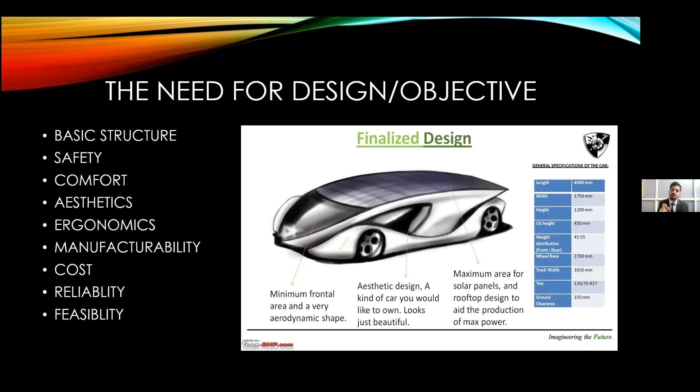Okay, so let's discuss a couple of things while designing a vehicle. First is the application. Let me consider some examples.

Just suppose I'm a person who completed my graduation 4 or 5 years before, and I'm working in an organization, and now I'm capable to own a car with finance. My family never had a car, this is my first car in the family, and I belong to a middle class family. Cost and mileage are crucially important for me. So which car would you suggest to me?

Can anyone answer that? Hello. Participants, please. I-20, okay. If anyone wants, you can type in the chat box. That's okay. I-20. Yeah, kind of I-20 or Maruti Suzuki. I'll prefer Maruti, yeah, definitely.

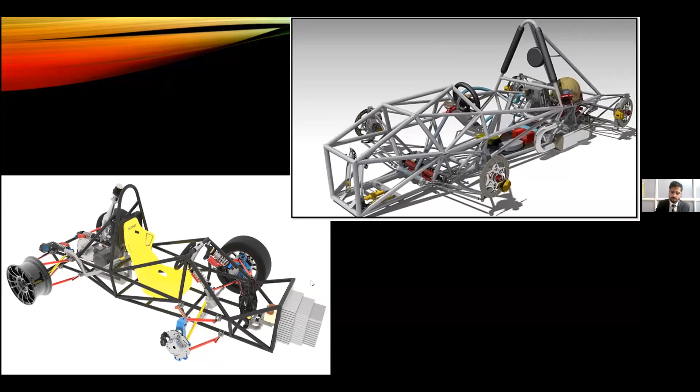Okay, so here are some videos. Just look at what we're discussing about the application of the car according to the market segment - how companies design their cars according to market segment, and what are the priorities: mileage, aesthetics, performance, or adventure and excitement of speed. Just look at it.

Is the audio coming? Yes sir. No, not yet - video was not audible. Ah, was the video audible? No sir. Okay, just now the video is coming.

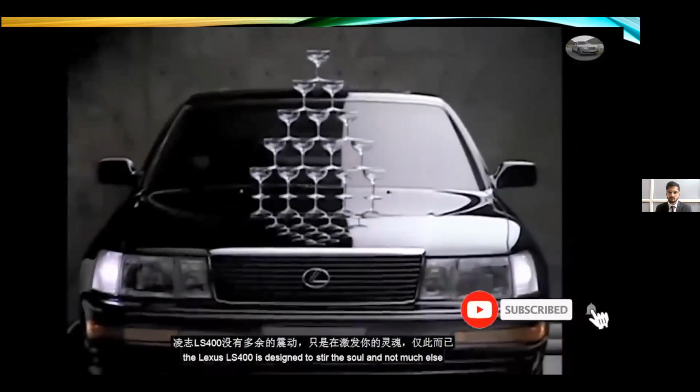After years of intense work, Lexus is ready to celebrate.

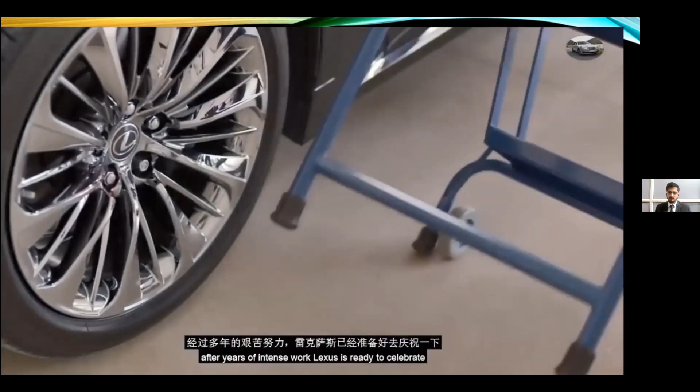Because even at the equivalent of 145 miles per hour, the Lexus LS400 is designed to stir the soul and not much else. Happy anniversary, Lexus.

Stability, elegance. Great.

Guys, I would like to hear more answers. So what's your comment? You can type anything.

There are various kinds of factors associated with this vehicle. Lexus is focusing on the comfortability, elegance, and stability of the car. Their primary focus is stability. Okay, just one more video.

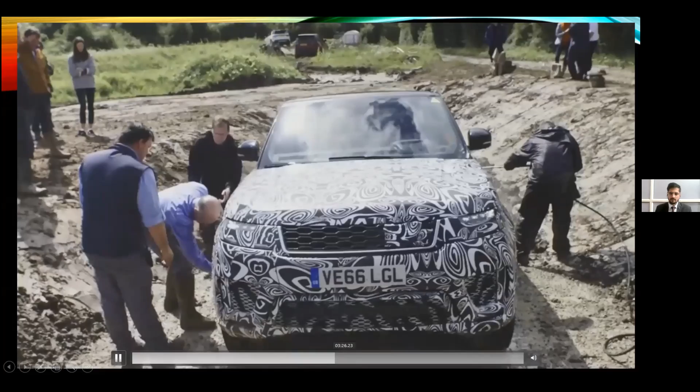This challenge is the most extreme one we've done yet. The plug-in hybrid, having that grunt of both engine and electric, will be a great benefit. But we're really pushing the limits. There really is a chance of failure. As far as I know, nothing has ever been tried like this before. This is unheard of. It's crazy.

It's very steep, it's 45 degrees. Well, yeah, it's like this, right? Yeah. I can't see anybody living if the car started rolling back down the hill.

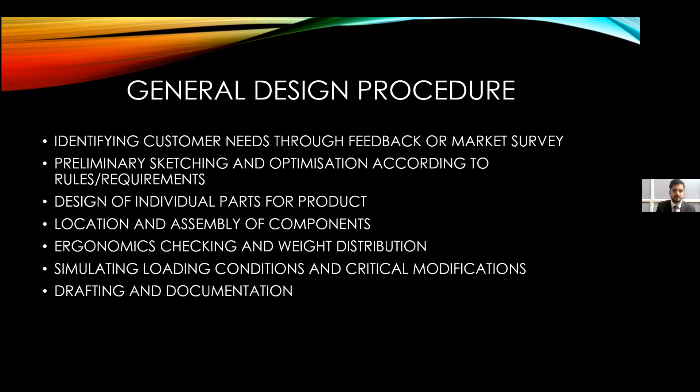So let's discuss what is the chassis and what is the frame. Before discussing it, can anyone tell me the difference between the chassis and the frame in the chat box, or you can open your mic and we can discuss it.

Okay, so should I go ahead?

Chassis is the base of a car. Okay, this is in a metal. You can call it as a foundation. Yeah, that's great.

Okay, I understand, guys. You are taking sessions from morning and it's your last session. But that's okay. Let's make this more interactive. And if I'm boring you at any time, you can say to me. Yes. Oh, that's great. Tejas, Gaurav, Anil. Yeah, that's great. That's great.

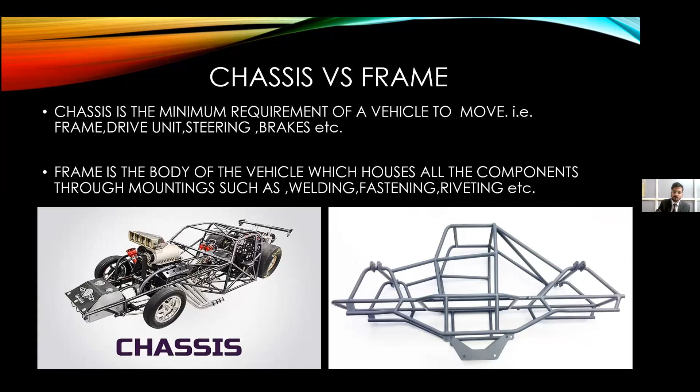Commonly used material for a vehicle. So when we design a vehicle, we generally use three kinds of material. Either we use steel tubes, aluminum kind of alloy metals, or carbon fiber materials, or related with glass fiber also. Okay, so every material has a different kind of specifications and different kind of rules in different types.

Okay, so when my budget is limited, and I need to make a good quality vehicle, weight is not a constraint for me, so in that case I'll use a steel tube. If weight is a major constraint, and budget also needs to be considered, I'll go with the aluminum tube. And if the budget is not a constraint for me, and I need to make a very efficient, lightweight vehicle that could deliver a high performance, I'll go with the carbon fiber.

Okay, so can anyone tell me, most of the vehicles available in the market, or most kinds of projects that we participate in, either SUPRA or BAJA, we generally use steel tubes. Why do we use steel tubes? Is this for specifically?

Okay, so basically for us, the major constraint is manufacturability. Yeah, cost effectiveness is one of the major concerns, but I'll not take the cost consideration, because if you are able to crack some good sponsorship from the market, you can put lots of cost in your vehicle. But the major constraint is manufacturability. We have limited resources in college. You are not running an industry, and even in industry, we don't have each and every kind of machinery. So everyone has a different manufacturability constraint.

As far as a college project is concerned, our major concern is manufacturability; we have limited resources for welding, grooving, cutting, or bending, everything. Okay, so we prefer steel tubes because weight is a factor, but not a major factor. If you are participating in a solar vehicle, definitely weight is a major concern. In that case, a couple of teams, you will see, use carbon fibers for their chassis, for their whole body.

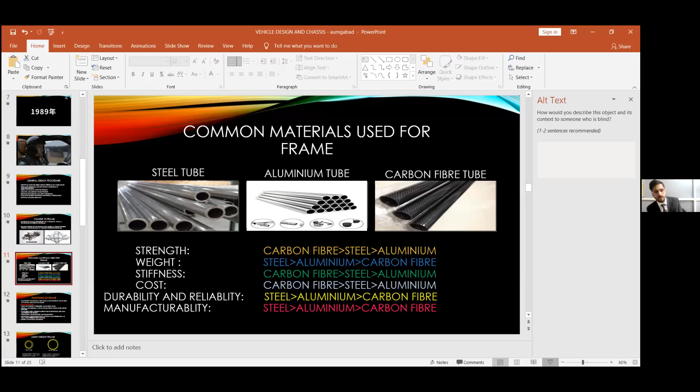Okay, so these are the factors we need to consider while selecting our material: strength, weight, stiffness, cost, durability, reliability, and manufacturability. These are the concerns for a frame. We have already discussed a couple of things. So, what are the mechanical components or vehicle dynamics that carry a load on the frame? All the factors need to be considered while designing a frame that will carry the weight of the vehicle in a passenger vehicle or a cargo load. So according to the stability or strength, we need to select our material.

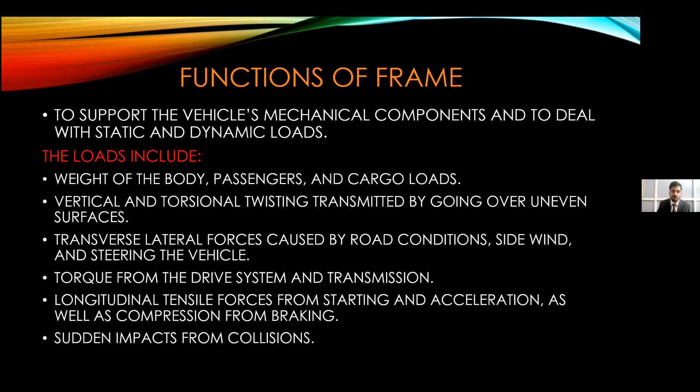And what are the mechanical properties we need to see? Either yield strength, shear stress, tensile strength, longitudinal tensile forces. All the forces we need to calculate while designing a frame or selecting a material for a frame. Okay, so let's consider an example. You take a steel tube, its diameter is 25.4 mm and thickness is 3 mm. And the second time you take a pipe whose internal diameter is 31.75 mm and the thickness is 1.65 mm.

Okay, so if we go with the calculation, you will see that the bending strength is about 387 Newton meter, bending stiffness is 2700 Newton meter, and the weight of 1 meter is around 1.64 kg. And if we go with the calculation for the second type, we will find that bending strength is around double that of the first object, stiffness is also 1.3 times higher than the first object, and weight has reduced from the first object.

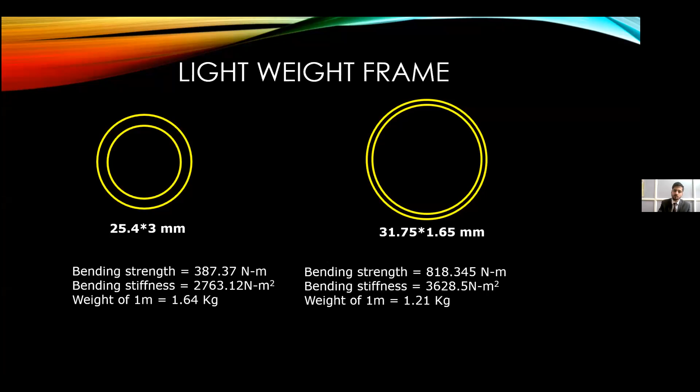So we should choose material after all the calculation. Here you can see that if I choose the second object compared to the first object, I can reduce my weight 26%, and my bending strength is also improved. Because if you go with the formula of bending strength and bending stiffness, the internal radius or internal diameter of a hollow pipe plays a very crucial role. If you remember the formula, that's pi by 4 r to the power 4 outer minus internal. So your radius to the power 4 plays a very crucial role.

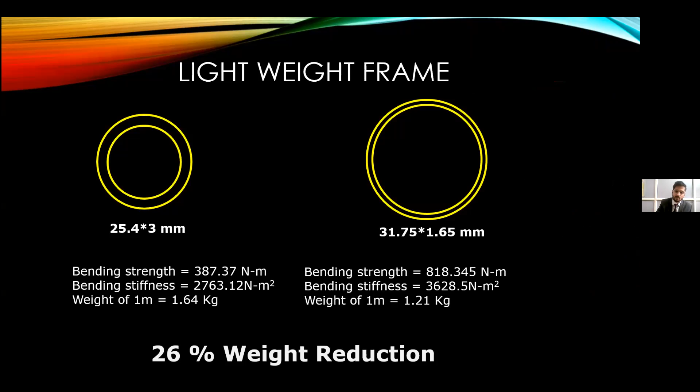Okay, these are all the factors that need to be considered before designing a frame. A couple of points we have already discussed: weight distribution factor and height of CG, which control your vehicle stability and handling, the ground clearance, and bending and torsional stiffness of a frame. If you are designing a solar vehicle or an electric car, definitely you need to work on your panel area, because it must tap maximum solar power so that you can utilize the maximum efficiency of your vehicle.

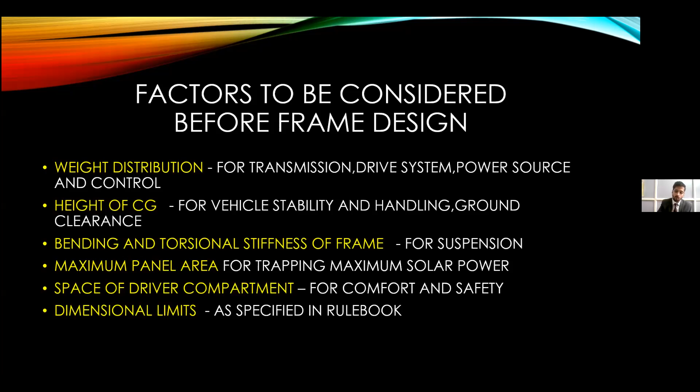Okay, and space of your driver compartment. Your driver should feel comfortable when he or she is driving a car. So the space for the driver should be ample so that he can operate each and every instrument cluster, gear, clutches, panel, everything in a very smooth manner. The dimensional limits: if you are designing a car for an event, definitely you need to consider all the dimension limits specified in the rule book. Okay, these things are about weight distribution and vehicle dynamics.

We generally study three types of motion of a vehicle. First is rolling. These are the failure modes: when the vehicle is running, what kind of vibration or what kind of failure could happen. Just suppose your vehicle is going straight and it rolls to the left side or the right side. So it's called a rollover; your vehicle is rolled over. If your vehicle is going straight and this kind of motion happens, it's a yawing motion. It's because of your suspension and because of your steering.

And if your vehicle is steeply going downward, and when you are accelerating your vehicle is going upward, it's called the pitch of your vehicle. When you suddenly panic brake, it goes deep down, and when you are accelerating your vehicle, your front side goes up. So that's called pitch. So all three dimensions we need to consider while designing, and apart from the frame, other compartments like suspension and steering, we need to consider all the factors. So these are a couple of factors of the weight distribution of a car in a hilly area.

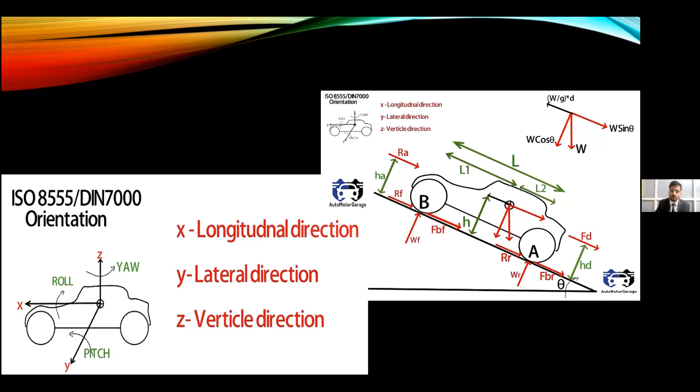So watch this video carefully. It's very well explained about the frame, step by step, like how we design a frame and which kind of mountings and which points need to be considered. It's a very old video, but a very relevant video.

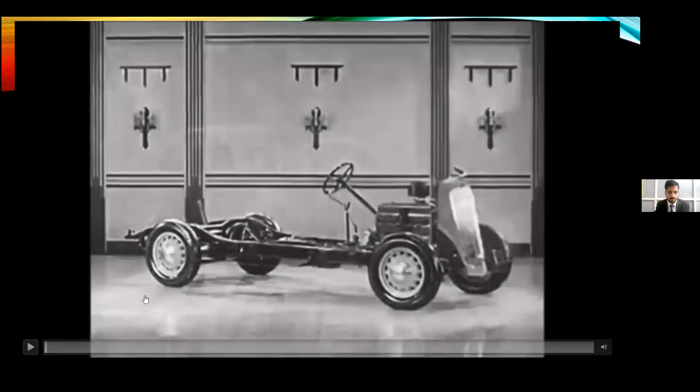Automobile, the foundation is the frame.

Is the video audible? Yes, sir. Anyone? Yes, sir.

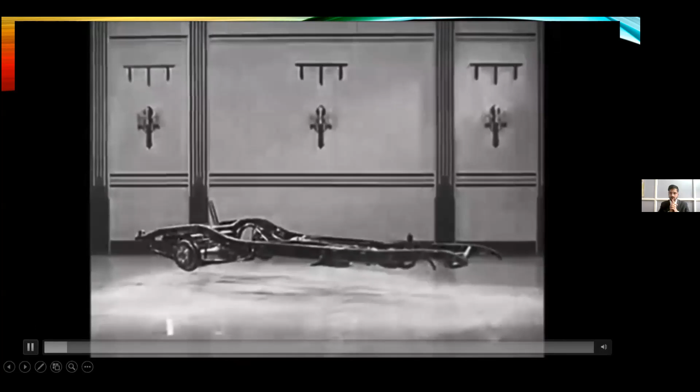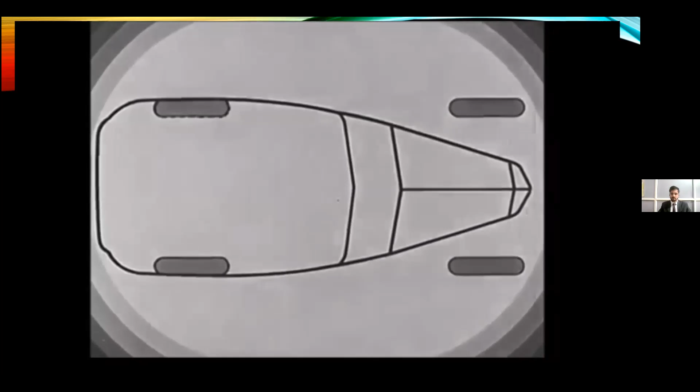Yes, sir. Few people see the real foundations of their houses, and few owners see the frames of their automobiles. And there are many important engineering developments in the modern automobile frame which aren't apparent when you look at the car. Let's see what an automobile frame has to do, and what kind of a frame is required to do the job. This line is the road. These are the wheels, and this is the body. Now let's look at it from another viewpoint, looking down on top of the car. The car is supported at four corners by the wheels. We must have a strong, rigid foundation to support the body over its entire length. So let's take off the body and build a foundation, starting with these two pieces of steel, which we will call side members. Now we need something to keep the side members apart and something to hold them together.

So we put in two more steel pieces, which we call cross members. But how are we going to turn those front wheels? They haven't enough room. Well, let's give them all the room they want. Let's make the frame narrower in front. That's better. How about the rear end of the frame?

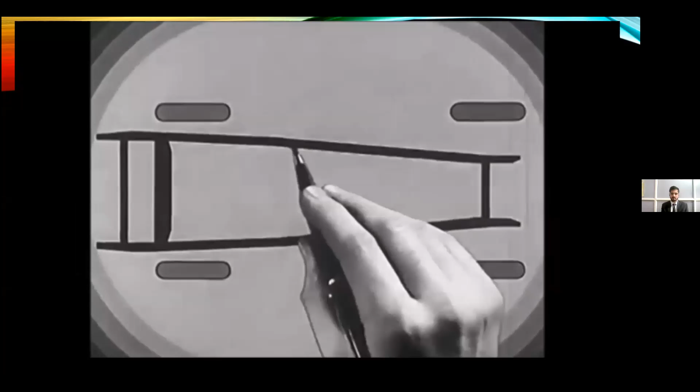We've got one cross member, but that's not enough. It will give us a good, rigid support for the gas tank, but we need something stronger than that. Let's put in another one that makes the rear of the frame strong and rigid. And just to make sure that our foundation won't go together in the middle like this, let's put in another cross member right about here.

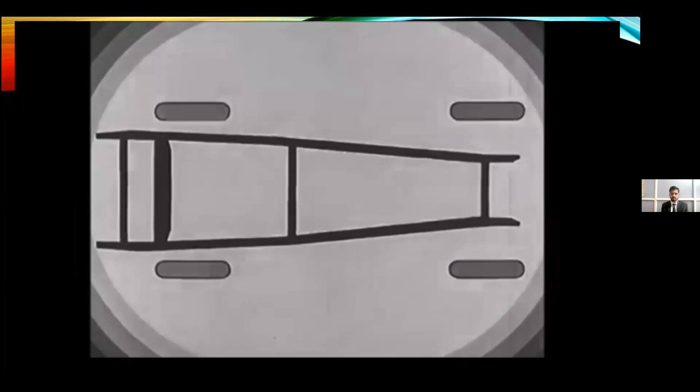Now we have a frame that you can't pull apart, that you can't push together. Pretty good job as far as we've gone. Hey there, that won't do. To prevent this sort of thing, let's put in some more steel girders like the letter X.

Now, any force applied here will be transferred to the center of the frame. But we don't want to be compelled to make this center crosspiece too heavy. So, to help spread the strain, let's put in these members, like the letter K. Of course, we have to consider the engine. We're going to support the front of the engine here. So we'll have to have another cross member here to support the rear of the engine.

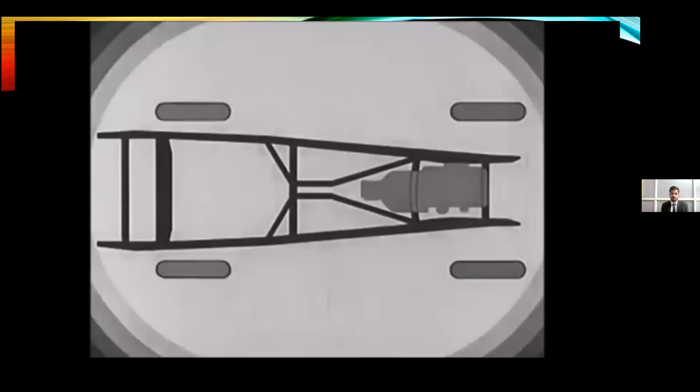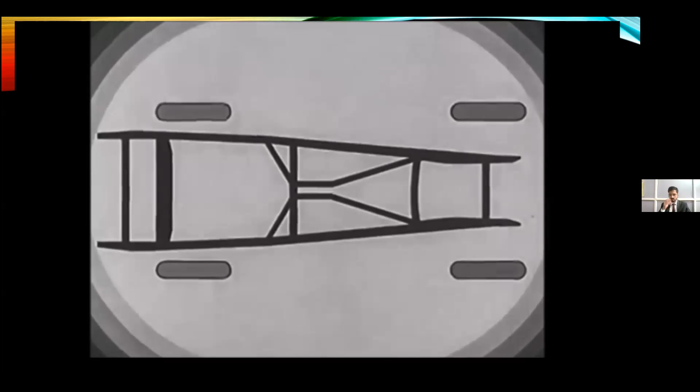Now we've designed a skeleton frame. But before we ride on it, we'll have to do some figuring. And the first thing we want to know is, what part of the frame is going to get the most severe strain? Or, as engineers would say, where is the point of maximum stress?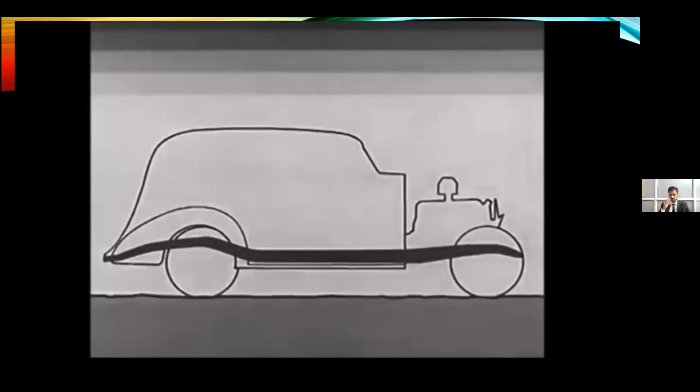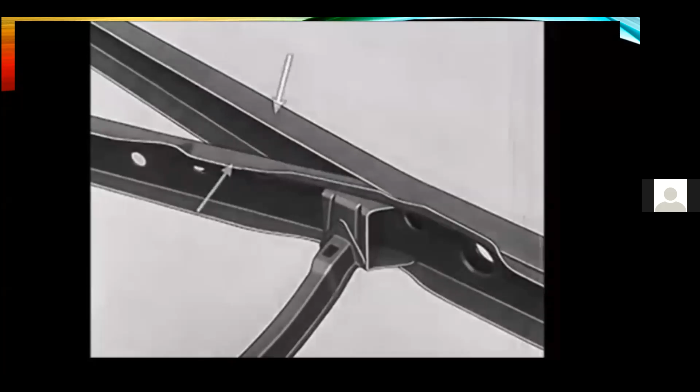So it is with an automobile frame. The point of greatest strain is here at the front edge of the steel box or body of the car. And on the frame, that point is here. The usual way of building this part of the frame would be to use only one piece of steel. But in this frame, we're going to use two steel girders like this and tie them together with a heavy steel plate known as a gusset. This construction gives us rigid strength where we need it.

Another point of great stress is here. So here again, we add a heavy steel plate to give us extra strength. When we ride on the frame we have designed, we'll find that there is another point of heavy strain, here in the hump, where we bent the side member up to get over the rear axle. So we'll give it a reinforcement too.

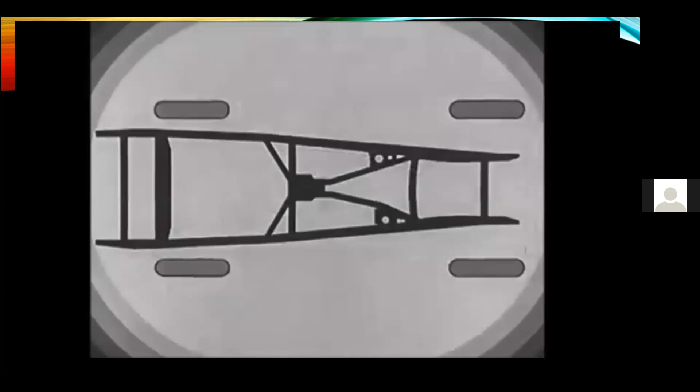Since we are going to have harmony between the front and rear springs, knee action, on the car we are building, let's make the front end of the car as rigid as possible. With knee action, we use this sturdy girder of steel to hold the wheels. It's time to add these brackets, called step hangers, which support the running boards. And now look out for the rivets. Here they come.

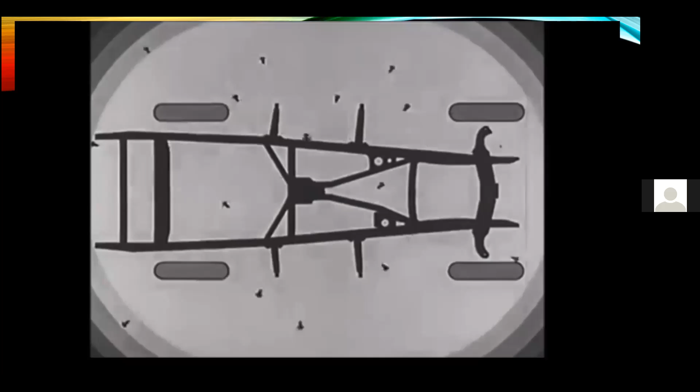219 tough steel rivets to hold our frame together. Cold-driven rivets, too, that won't shrink after they're in place. Now we have a strong, rigid foundation. With this YK frame, your car will stand up under the hardest usage for tens of thousands of miles. Strong, heavy side members for support.

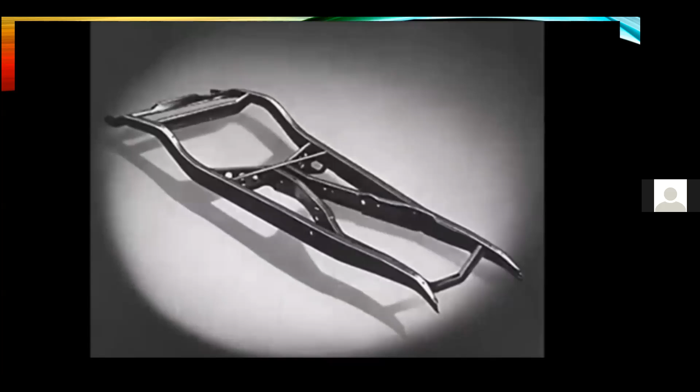Sturdy cross members for rigidity. Big steel center braces for strength. Heavy reinforcements at points of greatest strain. A good husky support for the engine. And a strong crosspiece to hold the knee action wheels. Such a frame gives rigid support to the whole car.

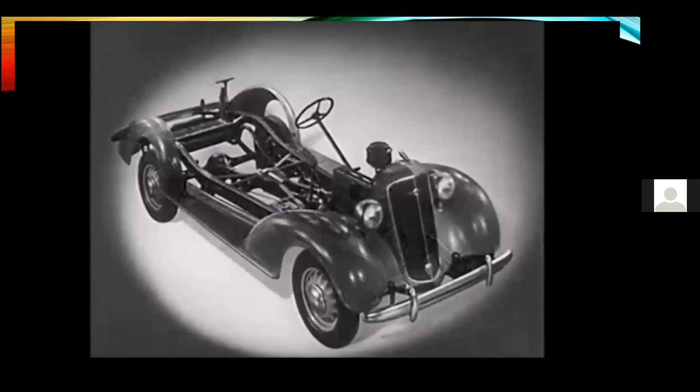Springs, steering gear, and engine have a firm foundation. The body and every part of the car ride on a frame that is solid, strong, and safe. With such a foundation for your car, you can ride on good roads or bad roads or any kind of road. Your car has a foundation to protect all vital parts from damaging shocks and strains. Summers and winters may come and go, but such a house on wheels will never have to fear the creaks and rattles of a home foundation.

So this video explained a very broad view about frame designing. More or less, designing has changed drastically over decades, but the basic concept remains the same. What we discussed here, we are still using the same kind of concept while designing a frame.

Okay, so here we are discussing which members are called the primary members, which are called the secondary members, and which are called the smart members. Some events also call it the tertiary member, but I remove the tertiary member and rather call it the smart member.

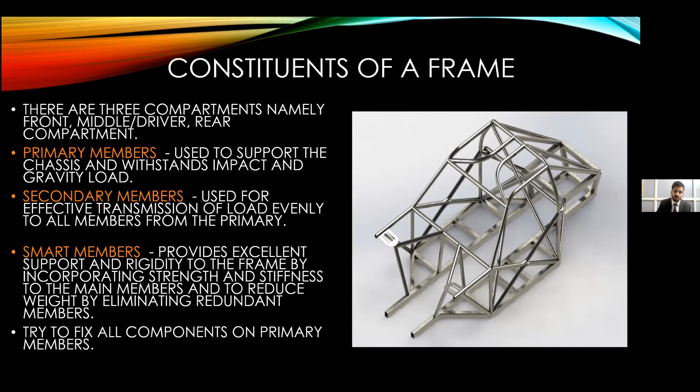Okay, these are some ergonomics points while designing the driver compartment area, while designing a seat, while designing the driver position or sitting position. We need to consider a couple of angles, because when you are running your vehicle for a couple of hours, you should feel very comfortable.

You cannot run a vehicle with pain in your back, with pain in your elbow, in a very uncomfortable position. So we need to design a very comfortable, very ergonomic position so that the driver can hold this position for a very long time without any fatigue. So these points we need to consider, like sitting position, SP1 and SP2 position.

SP1 is sitting position first and SP2 second. SP1 and SP2 are the positions of the driver where he can see the front area. If the visibility is related to the vertical area, in the bottom figure you can see that generally for the car, SP1 is 1.5 meters from the front end of the car along the length parallel to the road. This point should be visible by the driver's eyes. So this distance is called SP1.

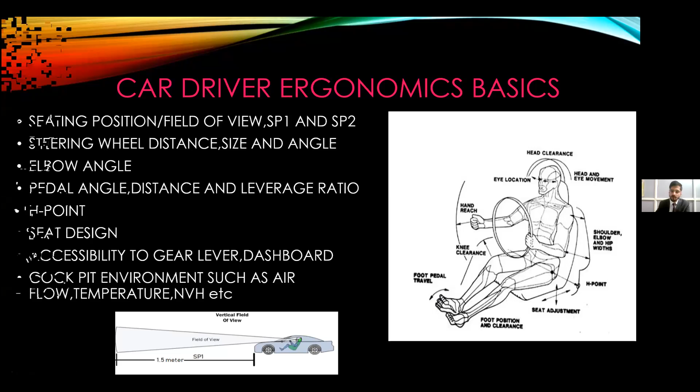Okay, for the general vehicle, we consider the leg angle 120 to 150 degrees, hip angle of 90 degrees, and elbow angle 120 to 160. If you are designing a racing car kind of event like Supra, you consider the same kind of parameters because you have to run a very long and very high speed vehicle.

And if you're designing a vehicle like a Baja or other kind of events, you can compromise on a couple of things, but it should be comfortable. This is a limit, 120 to 150 degrees. Whatever you are choosing, it's okay, but choose it according to your application.

In SolidWorks or ANSYS, if you want to analyze all these factors, you can use some commands. There are some dummies you can design and a couple of details or commands you can use to design all the angles with the different points.

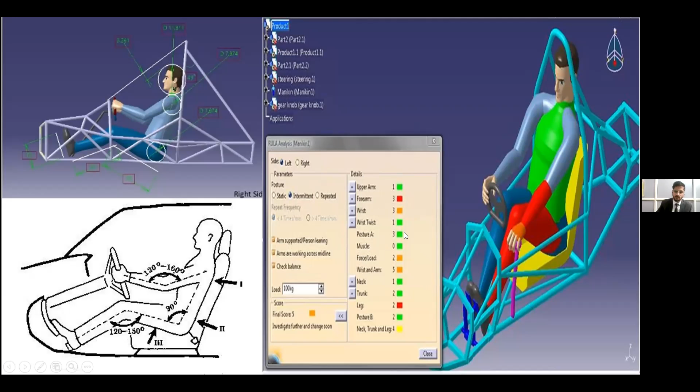Okay, so in frame, we consider the stress. What is the load that is put on a per unit area? Stress is an external property. When external force is applied to a material, what amount of force one particle distributes to its neighboring particles, that is called stress on a per unit area.

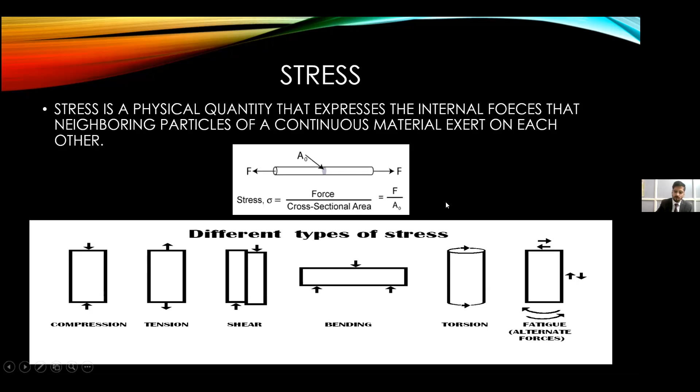There are different kinds of stress we generally study: compression, tension, shear stress, bending, torsion, or fatigue, and we analyze all these terms while designing a frame. Another part is strength, but both formulas are the same. Strength is also load per unit area, and stress is also load per unit area. But strength is an internal property of a material, while stress is induced by the external loading.

When your object has a greater strength than stress, there will be no failure and no problem. But when stress is greater than strength, your object will fail. In this picture, you can see that if I apply tension to this object, when my stress is greater than strength, the piece will break down.

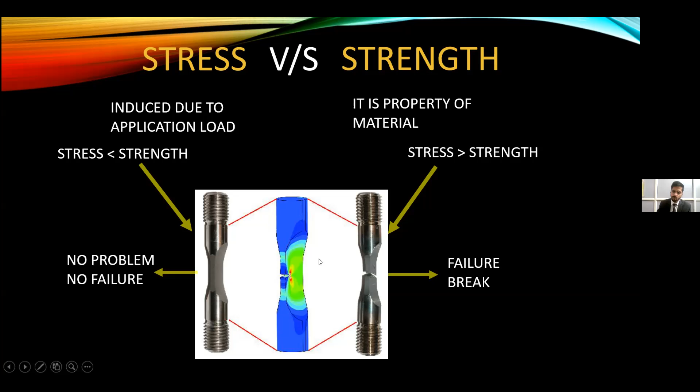Okay, so this is an interesting topic, not really related to the frame, but related to the body. Lots of times, companies take inspiration from nature. They design their vehicles taking inspiration from nature because nature has the best mindset for designing. Nature is called the master of design. Whether you are designing a vehicle, a train or any kind of object, nature has every kind of design available. That process is called biomimicry.

It means you take an example of any animal species and try to copy that behavior, the advantage nature has given them, and implement that advantage in our object or our vehicles. In that picture you can see a designer sketching by taking inspiration from the shark. Can anyone say which car this design is similar to? Which car is this design matching?

In the chat box, anyone? Innova. Okay, that's interesting. Tesla. Exxon. Okay. Actually, in this video, that person didn't tell which company this design is matching.

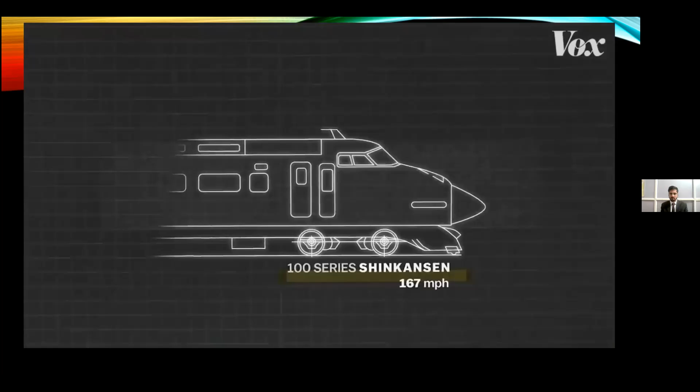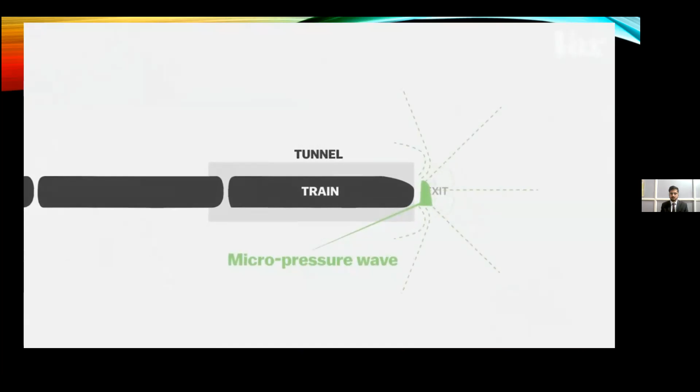In 1989, Japan's Shinkansen bullet train had a problem. It was fast, really fast, like pushing 170 miles per hour fast. But every time it exited a tunnel, it was loud. The noise was coming from a variety of sources, but whenever a train sped into a tunnel, it pushed waves of atmospheric pressure through the other end. The air exited tunnels with a sonic boom that could be heard 400 meters away. In dense residential areas, that was a huge problem. So an engineering team was brought in to design a quieter, faster, and more efficient train. And they had one secret weapon. The manager of the technical development department was a bird watcher.

Different components of the redesigned bullet train were based on different birds.

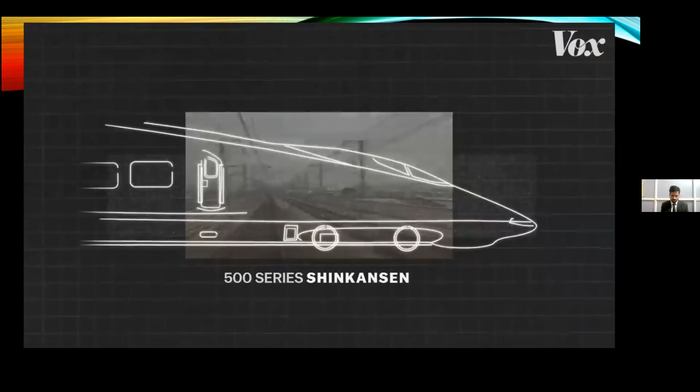Owls inspired the pantograph, the rig that connects the train to the electric wires above. Nakatsu modeled the redesign after their feathers, reducing noise by using the same serrations and curvature that allowed them to silently attack prey. The Adélie penguin, whose smooth body allows it to swim and slide effortlessly, inspired the pantograph supporting shaft, redesigned for lower wind resistance.

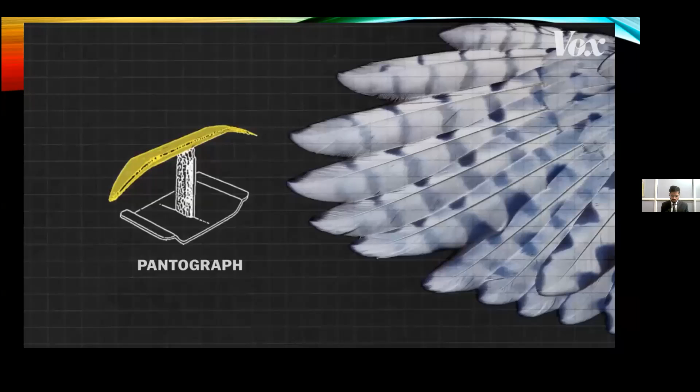And perhaps most notable of all was the kingfisher. The kingfisher is a bird that dives into water to catch its prey. The unique shape of its beak allows it to do that while barely making a splash.

Nakatsu put the design to the test. The team shot bullets shaped like different train nose models to measure pressure waves, and dropped them into water to measure splash size. The quietest nose design was the one modeled most closely after the kingfisher's beak.

When the redesigned train launched, it used less electricity and stayed within decibel limits in residential areas. It did all that with the wing of an owl, the belly of a penguin, and the nose of a kingfisher.

There's a name for design like this. It's called biomimicry.

The people who design our world usually never study biology, so they're novices in how the world works.

That's Janine Benyus. Back in 1997, she wrote the book that coined the term biomimicry. It told designers to look to energy and processes inspired by the natural world. Stick like a gecko, compute like a cell, run a business like a redwood forest.

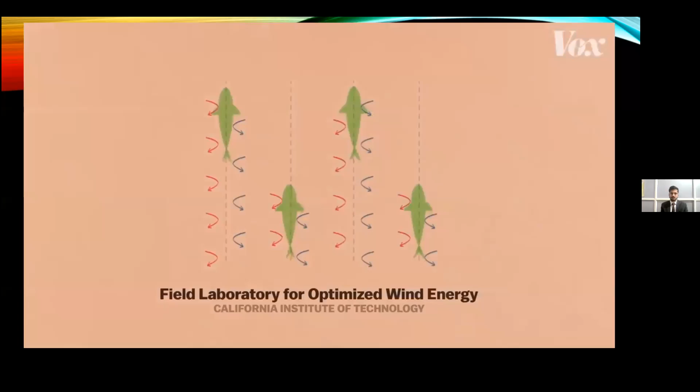Benyus has since worked as a consultant for various companies, trying to get them to understand how to take design ideas from nature. That might mean studying prairie dog burrows to build better air ventilation systems, shark skin to create bacteria-resistant plastic surfaces for hospitals, or arranging wind turbines in the same drag-reducing pattern that schools of fish swim in.

Designers get inspiration from a lot of different places, but Benyus thinks many of them could benefit from looking more at the natural world.

So there's a lot of looking at what other people have done, and they get ideas. They literally do, you know, a lot of designers have lots of magazines that they look through. They tear those out and they put them on inspiration boards. But they're looking at other human technologies.

Her idea was simple. Designers should get in the habit of bringing a biologist to the table and let them help solve problems by mimicking nature. And there are three main ways they can do that.

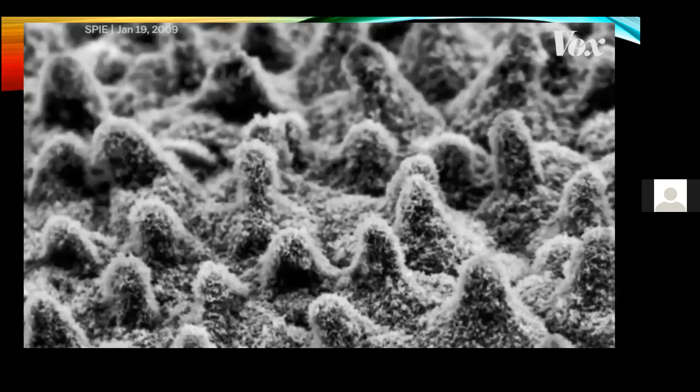You can mimic its form or its shape. You might create a paint for a building that when it dries, it's got the same structure as self-cleaning leaves. Lotus leaves are notoriously great. They let rainwater clean the leaf because they have these bumps, and the rainwater balls up on the bumps and then pulls away the dirt. So that lotus effect is physical, and you can create a physical structure on the outside of any product.

Imagine that on the outside of your car. Rainwater would clean your car. So that's mimicking form. But there's also mimicking process, the processes in the natural world.

It might even be how you mimic how ants communicate in order to efficiently find sources of food or new places to live. And those processes, that self-organization, has been mimicked in software, in things like autonomous cars and how they're going to move in flocks through the city by talking to one another. That's mimicking nature's process.

And then you jump up to the level of mimicking whole ecosystems, right? There's a buzzword right now that's really hot called the circular economy, which is essentially industry saying there should be no such thing as a byproduct in our manufacturing facility that goes to landfill.

It should be used by something else. And at the end of a product's life, that product should be upcycled into something else. It's being called the circular economy. Ecosystems do that really, really well.

You've got a log on the forest floor, and those materials move up into the body of the fungus that eats it. Those materials move up into a mouse, and that mouse material moves up into a hawk, right? And if you think about that as what we'd like to do with local materials being upcycled constantly in our cities, for instance, those ecosystem lessons are really big for us.

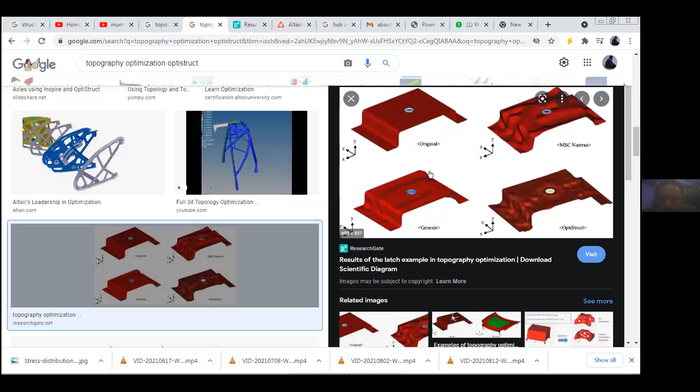Here you can see topography optimization in this example. You have this kind of component, but you didn't reduce the mass because the material used is the same — you just changed the graphical structure of the component. By changing the graphical arrangement of the material, you got better stress and displacement reports. So like this we do topography optimization.

So this is about design. Now let's go for the software part. There are a number of softwares available for design.

In design there are 3 things: first is CAD design, second is CAE, computer aided engineering, and the third is CAM, computer aided manufacturing. In CAD, you make the component, its geometry, and everything. In CAE, you do analysis and optimization, and in CAM, you go for the manufacturing part.

So let's move on to the CAD part.

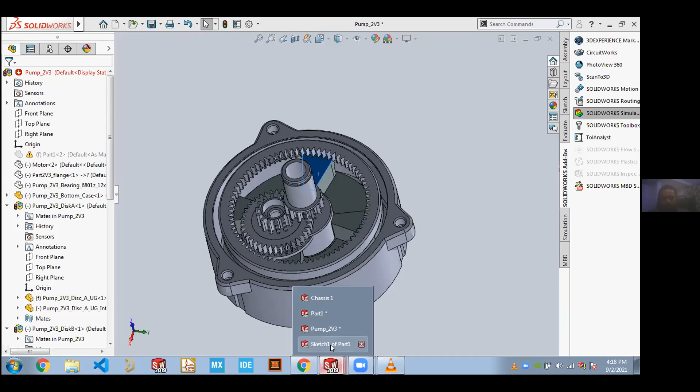For CAD, you can use SolidWorks, CATIA, ProE — all these are CAD softwares. You can do CAE in these softwares too, but there are some specific softwares for CAE engineering, like Altair HyperWorks, ANSYS, Nastran, Patran, and others. COMSOL is also there. So we will use SolidWorks. This is SolidWorks — you can apply for the student version of this software.

For creating any design in SolidWorks, first you have to understand the concept of planes. Planes are something on which you make 2D sketches and make reference to other entities too, like there are 3 planes: front, top, and right. To make anything, there must be references — front, top, and right are the planes on which we draw, or we can create custom planes if needed.

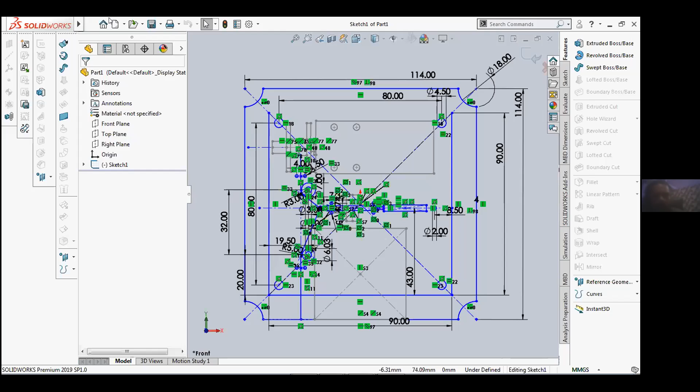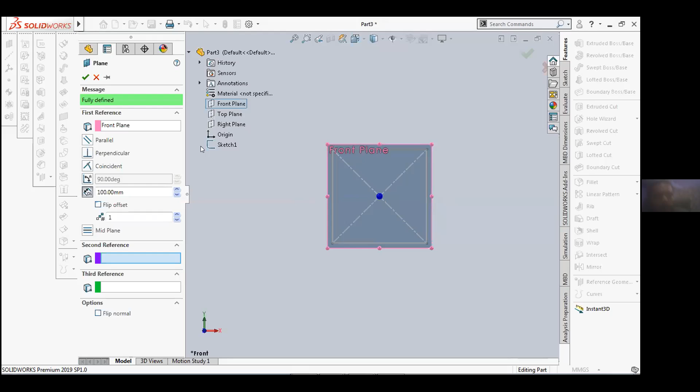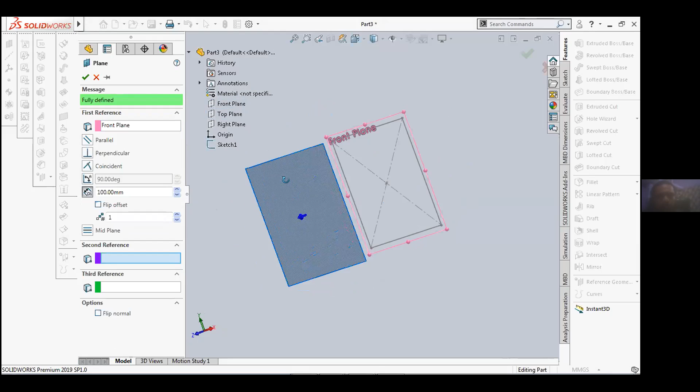Okay, so first of all, you can see in the reference of front plane, I had created another plane. You can see here. Okay, so I can define that different plane. The other plane I can define relative to that front plane. I can choose any other plane too. So you can see a different kind of... so you can make another reference from other entities too.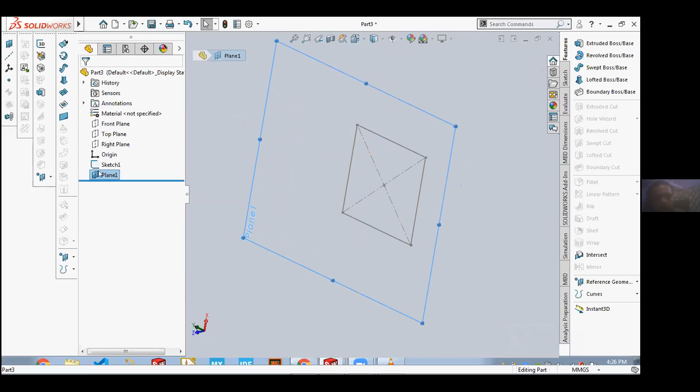Okay, so now I had created another plane at the distance of 100 mm from this one. So here you can see another plane is created. So now I am having one more plane. These three are the global planes. It means that if you are going to use any kind of software, it is not limited to only SolidWorks, but if you are going to use any kind of software in future, like CATIA or Pro, something like that, in those softwares there will be also three planes that are global planes.

In reference of these planes, our component is defined. So whenever you will export this component from this environment to any other environment, the geometries will be referenced from the origin, and that origin contains these three planes, and every operation we will do in SolidWorks or any other CAD software will be referenced related to these three planes, and the center point that is defining these planes, this is origin. Okay, everything will be relative to this origin.

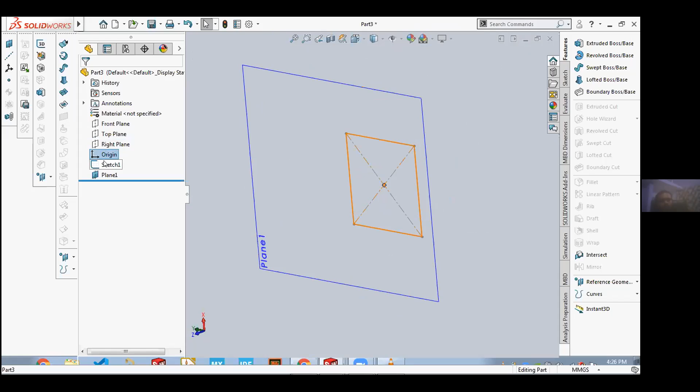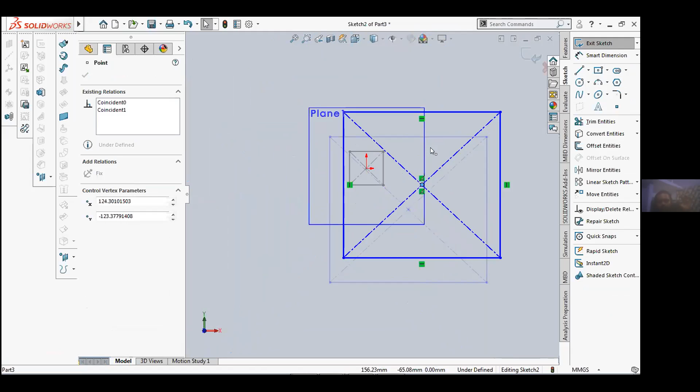So now we can choose another plane that we had created right now. You can see, and now we can make sketches on this one. Okay, so let me give you another example. Like this, I created a rectangle. Okay, so that rectangle is not constrained. We can move it anywhere, we can change anything. So first of all, what we will do is we will make its centers coincident. So now you can change the length of the lines, but you can't move its center point.

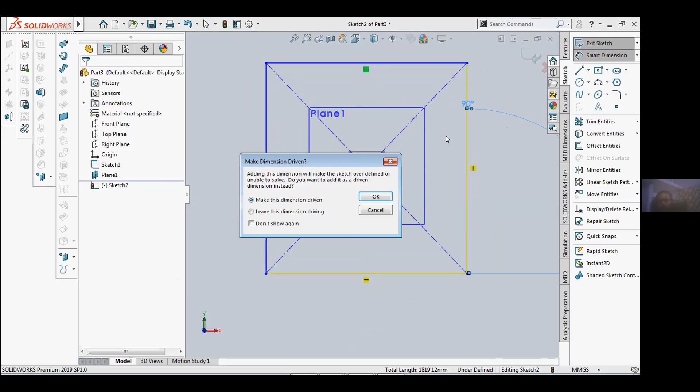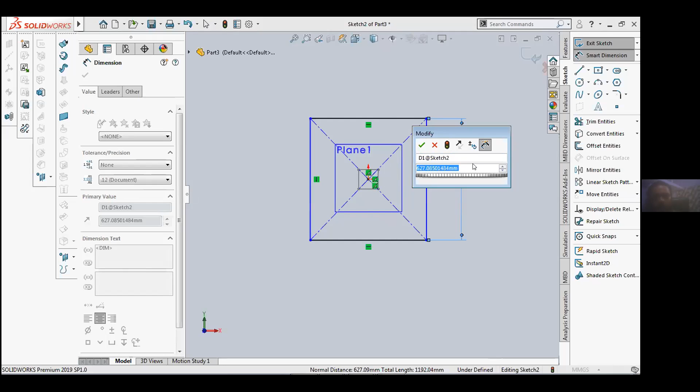So to make these constraints, we will select the smart dimension. You can constrain the two lines by selecting these two lines. You can define the center point distance between them like this. Okay. So the distance between these two lines is 180, or you can just give the length of any specific line like 120 mm.

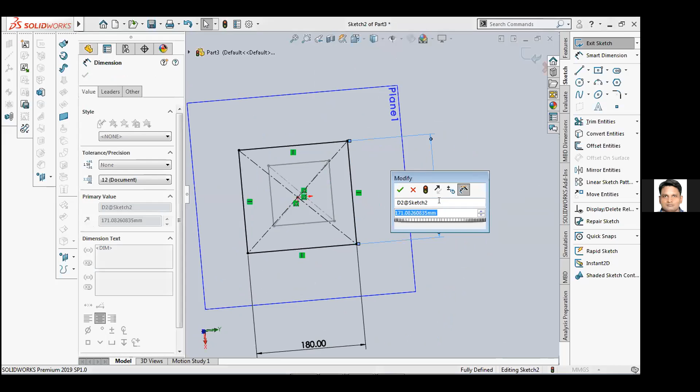Okay, now you can see, now it becomes black. So black means this one is completely constrained, so there is no movement. You can see here. So now we'll go out of that sketch. So now we are having these lines. So now we have two options: either create a plane intersecting these 2 points, or we can go in the 3D design panel. In the 3D design panel, whenever we draw a line, that line will consider the specific points in reference.

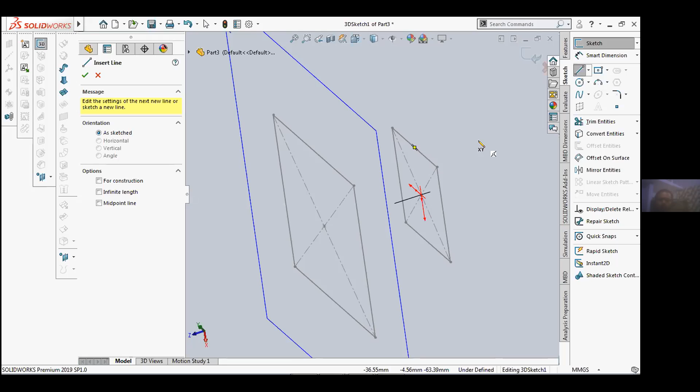So there is a difference between making 2D geometries and 3D geometries. Whenever you draw any 2D geometry, it is on some kind of plane. Either that plane might be created by you, or it might be on some structure, like you just extruded something and on the plane surface there is a face. It will consider that face as a plane too. So like this, if you make these lines in this manner. So the first one, this is the initial point.

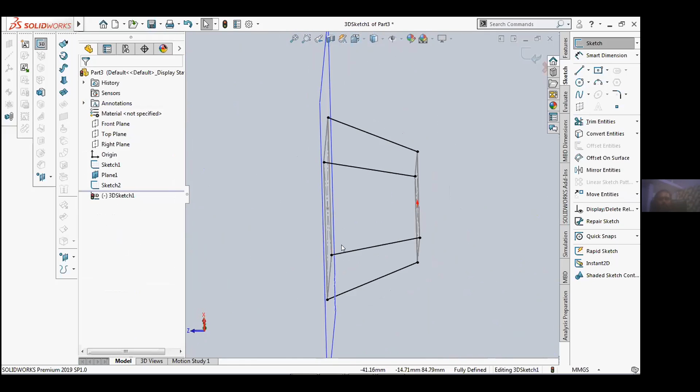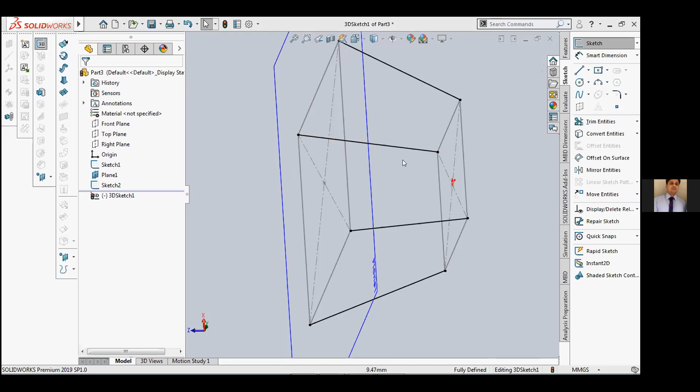So you can see this is the frontal structure of the frame. So this is line data. We didn't create any kind of sectional view or something like that, but we created the line data. From this 1D line data, we will apply the weldments. In weldments, what it will do is it will create the weld points and give the sections to the 1D data of this frame.

Okay, so now here there is weldments. We will go out of this. So here these are weldments. So whenever we choose weldments, there is a standard. There is inch or ISO mm. So different kinds of profiles are available. You can customize your profile too. So here, like we have chosen the pipe.

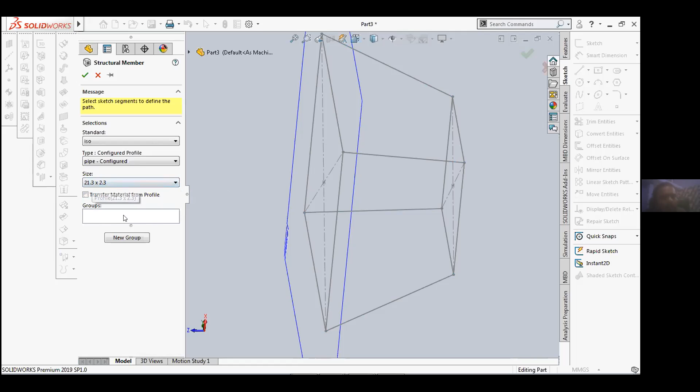Different shapes are there for the pipe. So we choose 21.3 into 2.3, and now we have to choose the lines. And according to these lines, it will create the profiling around these lines. So in the same manner, you can create this. So first of all, you define the points, and according to those points, you create the lines, and from those lines, you apply the profiling. This type of designing is used when you are preparing any frame, not for the chassis. In case of chassis,